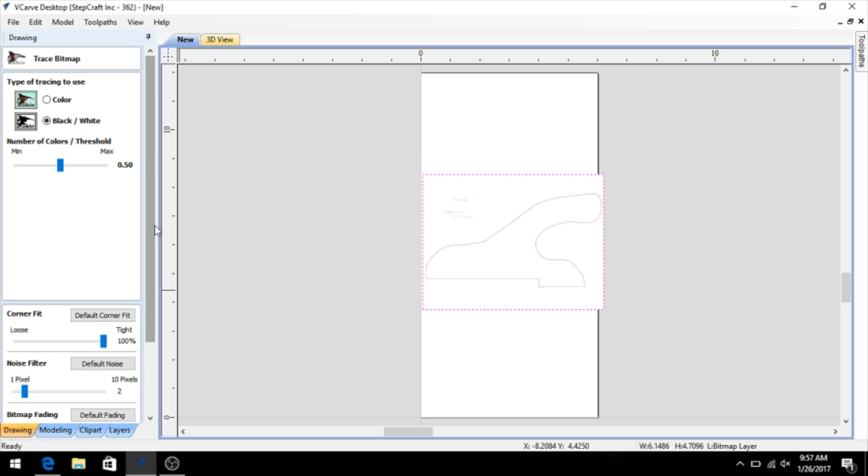First I just set up in the program the same dimensions as the plywood, then I import one of the photos of the push sticks that I like. I found this image online, and it's just an outline, so I am going to be tracing the bitmap to get an outline vector around this image.

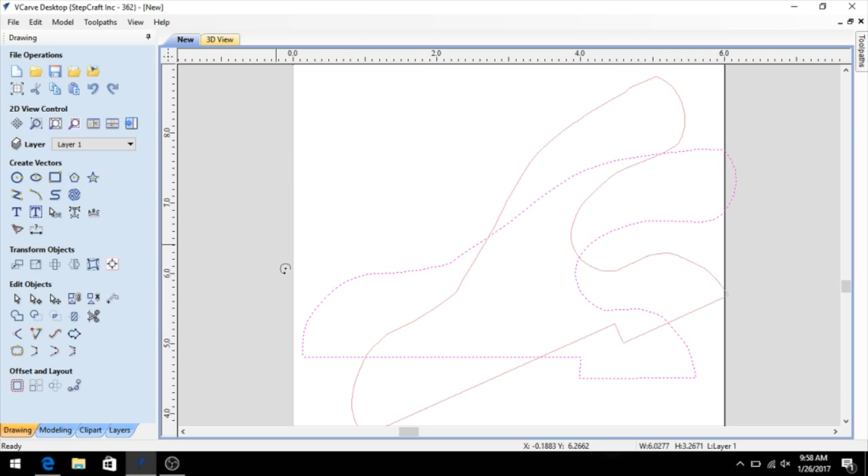Once I have the vector lines traced around the entire image, I could delete the image, leaving just the vector lines, and then delete the unwanted vector lines, leaving just the outline of the push stick itself. Once I had that, I just scaled it to the right size and centered it within the workpiece, and then I could work on the toolpath.

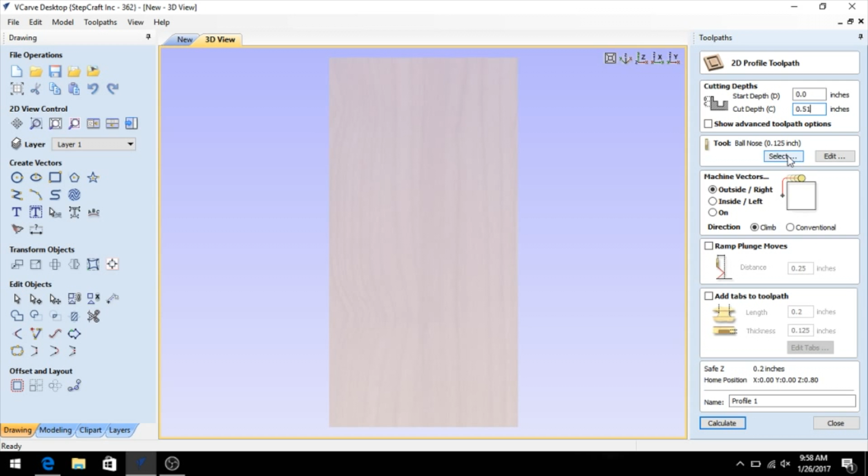I chose a 2D profile toolpath, meaning the cutting bit is going to be cutting on the outside of that vector line, so the piece inside the cut is going to be the exact size of the push stick that I want. Next, I set up the tool bit - I'm using a quarter-inch spiral end mill, and then I just added a few tabs.

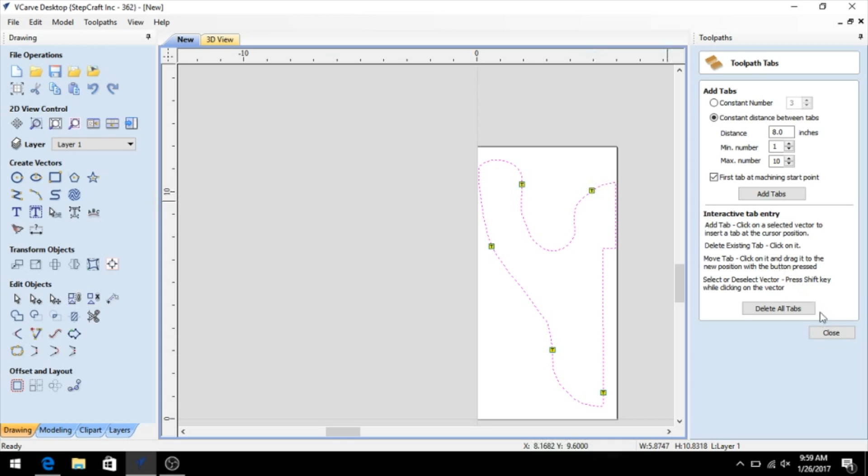Since I made the final cut depth deeper than the thickness of the material, which is half an inch, I made the final cut depth 0.51. The program's going to warn you that you're going to cut into your backer board, but since I just have MDF, that's not a problem.

Finally, I just previewed the toolpath. Everything looked good to go, so I saved it and worked on the next one.

This process is exactly the same as the first one, it's just a different style of push stick. Like I said in the beginning, I was just using some scrap plywood, and I didn't have a big enough piece to cut both styles in one file, so I had to break it up into two.

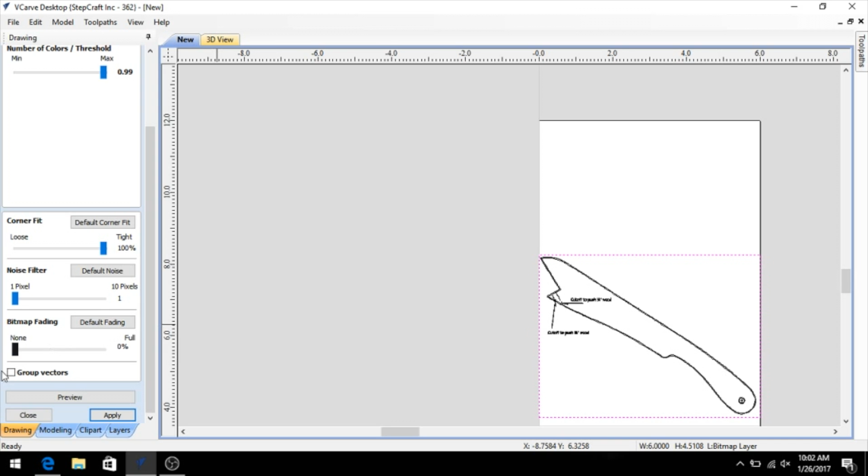Same as before, I'm just messing with the settings to get the cleanest lines around the image as possible, and then I just delete what I don't want the machine to cut out, which is some of the text and some of the lines and the little hole at the bottom.

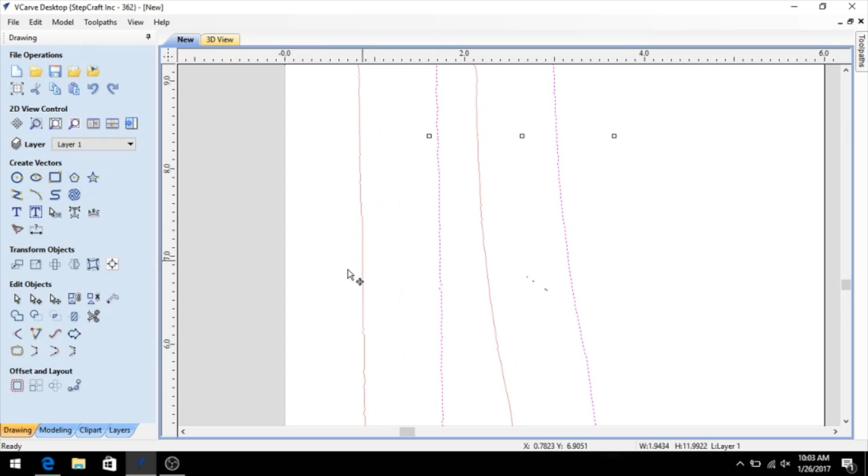For this style of push stick, you really need two of them working together as a pair. So I just scaled it to the dimensions of my workpiece, and then copied and dragged a second one so I could cut out two of them.

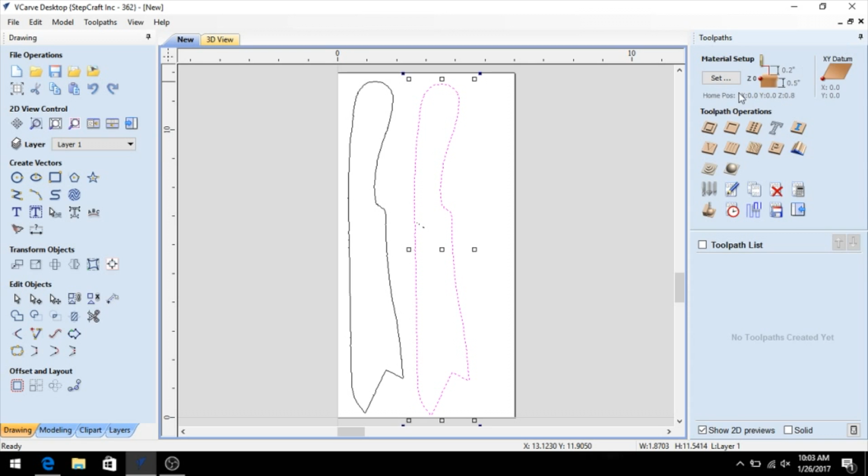Once I had both of the push sticks organized in the workpiece, I worked on the toolpath, and again it's exactly the same as the first one - a 2D profiling toolpath to cut on the outside of the vector line. I added tabs, and I'm using the same quarter-inch spiral end mill bit.